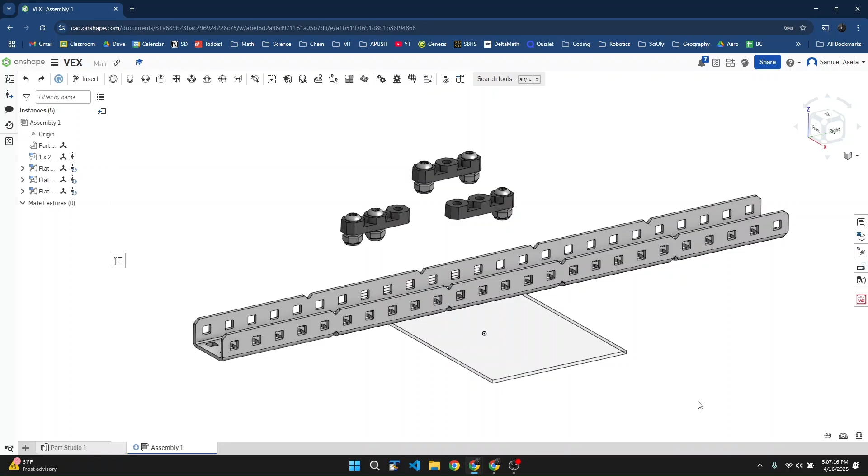To get started, I'm going to delete all of these parts in this assembly, and I'm going to insert two C channels. I'll make them 10 holes, and I'll just insert two here.

A good thing to know is that you can drag around your parts, or if you want, you can click on this icon with three arrows and move your part one directionally or two directionally. You can also rotate your part here, and it does it in increments of 5.

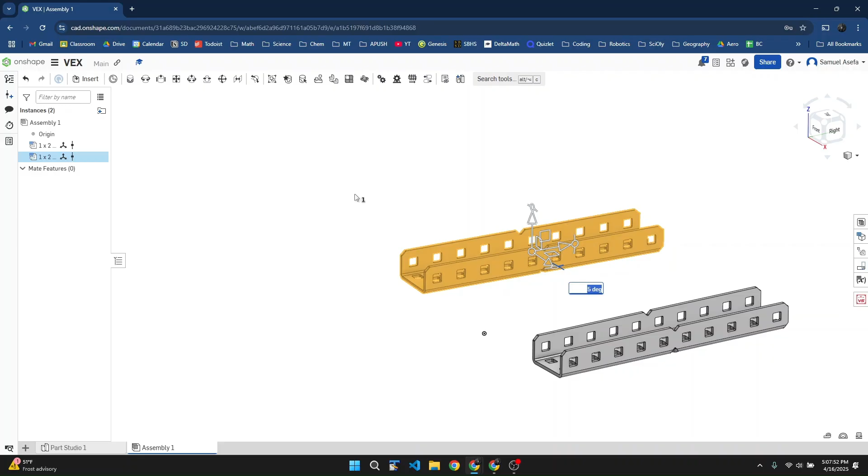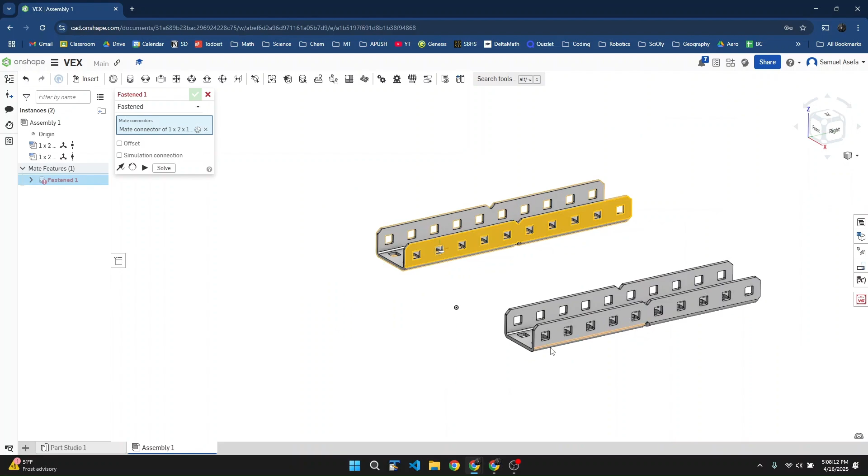Now if you wanted to mate some parts together, there are all these different options to mate, and the most common one is fasten mates. These are mates that restrict freedom of motion after you mate them in any direction. So if we were to mate this hole with this hole, and rotate this a little bit, it wouldn't allow us to move the C channels relative to one another. They're always going to stay this way.

To show how to mate parts together specifically, for fasten mate, once you click on fasten mate, you have to hold shift on the face that you want to mate with the other part. You hold shift so that it knows this is the face with all the mate connectors, and it keeps the mate connectors.

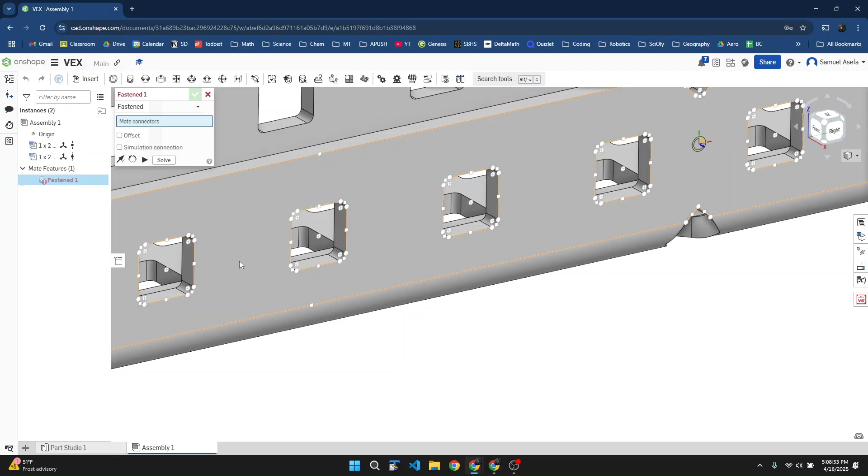Otherwise, the hole and the mate connector in the middle of the hole will disappear once you have your mouse over the hole. So you hold shift, then select the mate connector in the middle of the hole, and do the same thing for the other hole on the other C channel.

Then you hold shift and click this, and this allows you to have the two parts mated together. Right now you can see that they're overlapping one another.

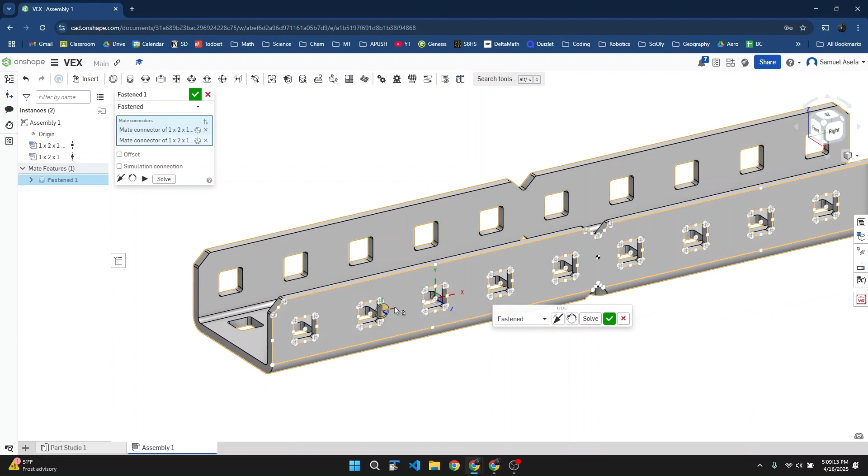Sometimes this happens, it's not the way you wanted it, or it's not oriented the proper way. Then you can just flip the primary axis or reorient the secondary axis, and this allows you to reorient the mate and do it as you desire.

I'm just going to click check because this is how I want it for now. And that's the most common type of mate, the fasten mate.

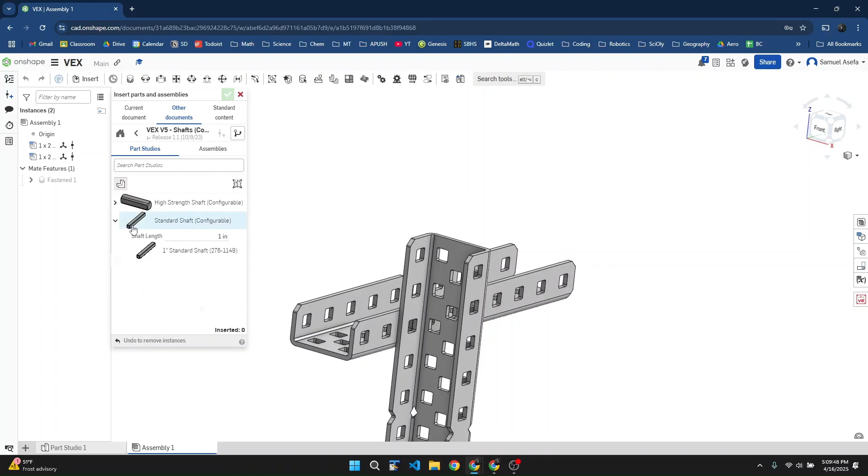Now to show the revolute mate, I'm going to be inserting an axle, because I feel like it's the best way to show it. I'll make it 3 inches long, and the way to mate stuff remains the same, but the type of mate you have affects how it can move afterward.

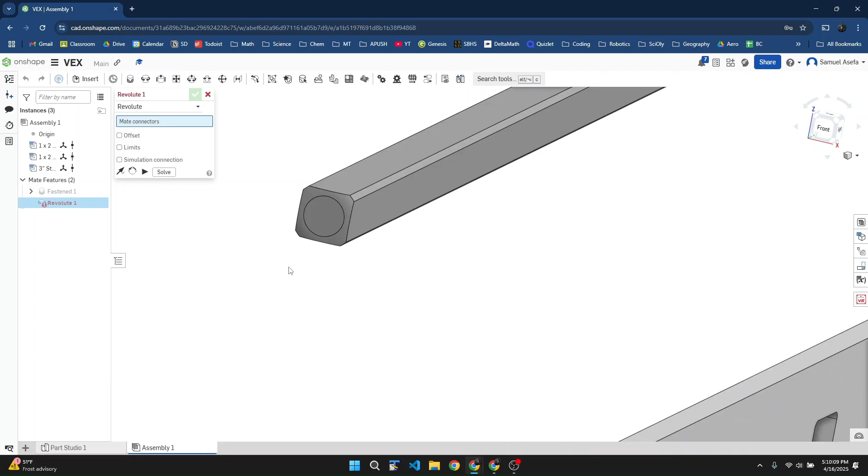With fasten mate, it doesn't allow you to move at all. But for revolute mate, if I click the center here and shift click the center here, it looks like it's the same thing.

But to show that it's a little bit different, you could right click on Revolute and click animate, and it shows you that it's able to rotate. Revolute Mate differs because it allows rotation in one axis, unlike a fully static mate like Fasten Mate. So that's how Revolute Mate differs.

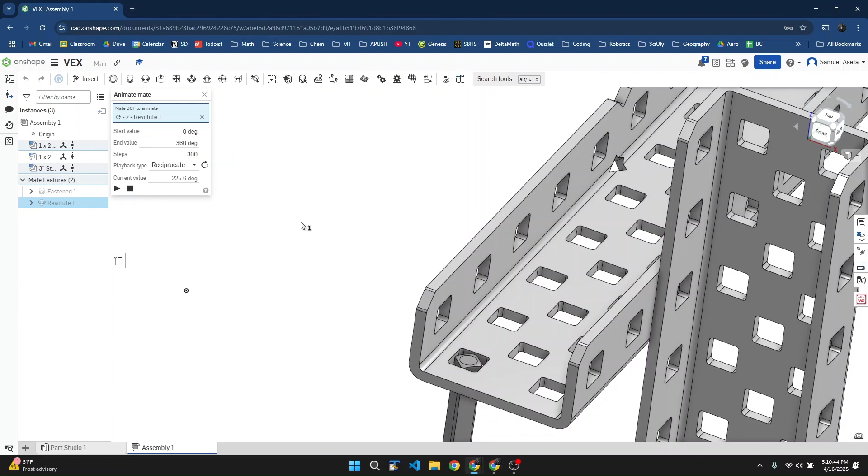You could use it for any parts that rotate relative to one another, and you can also edit mates once you have them.

So you could make this a slider mate, for example, and it shows you that you can slide this axle compared to where it was made originally, and you can see how everything else is moving. If you wanted only this axle to move and nothing else, you could click on the C channel, right click, and then click fix, and that would allow it to stay in the same place.

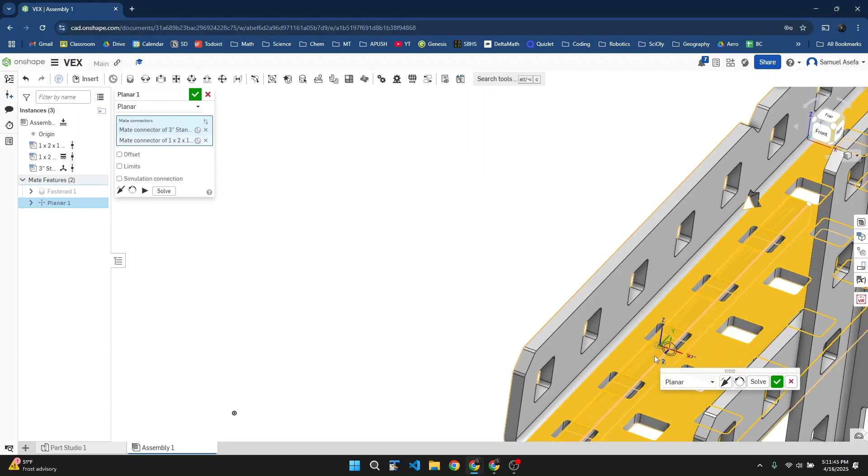Another type of mate you can have is planar mates. To show this, I'm going to delete this mate, and now I can move this axle again. Then I can just click on one of the faces of this axle, and then click on the face of this C channel here. Right now it's within the C channel, so I'm just going to flip the primary axis.

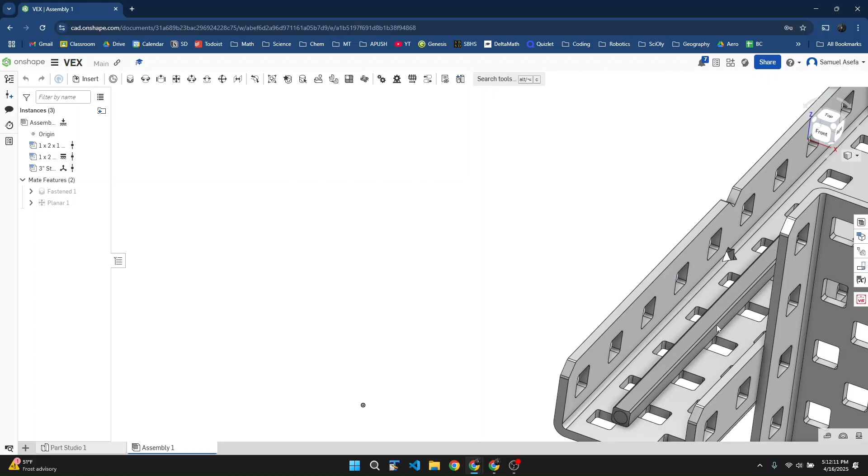After this, you can tell that you're able to slide this axle across the C channel. This is just like a hypothetical mate - you probably wouldn't use this in actual CAD, but it shows you that you can move it around. So let's say you had a robot on your field, then you could just drag your robot around the field and keep it on the field. So that's a planar mate. These other mates, you definitely won't use except for maybe parallel mate.

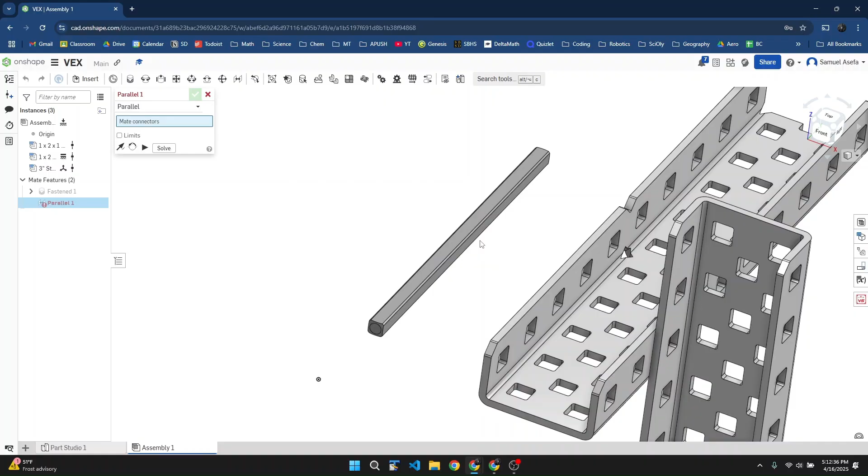To show what parallel mate is, I'm going to delete this. Parallel mate just keeps it - so if one of these parts were to rotate and it was parallel mated with this axle, then this axle would move so it's oriented the same way. To show this, I'll have this face, this top face, and then this top face also.

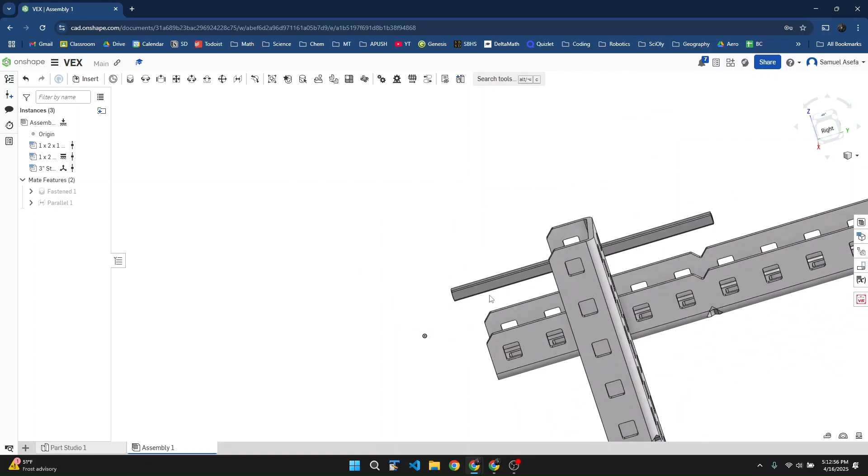Right now it connects them, but if you wanted, you could just drag it away. To show how it works, if you were to rotate this, I'd have to unfix this. If you were to rotate this part like this, then it keeps the axle parallel to the C channel. So sometimes it'll come in handy.

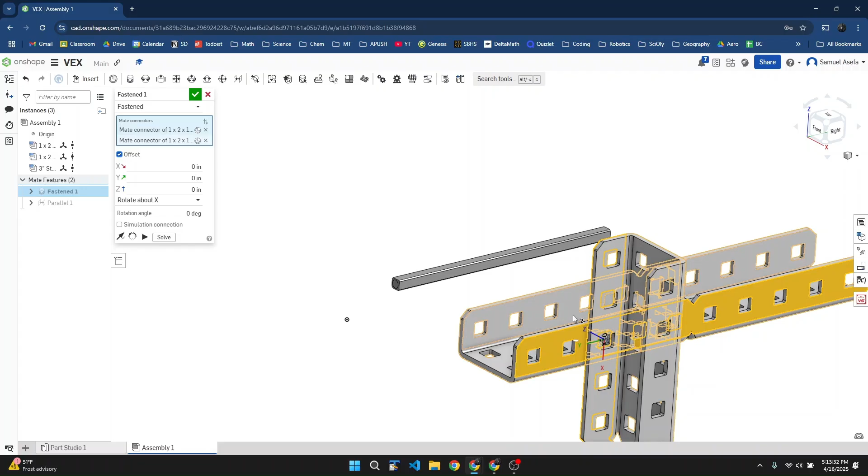So yeah, that's the last type of mate. And for offsetting, which I covered a little bit less - the way to offset, this typically is for fasten mates. You would edit your fasten mate, or when you initially create it, there will be this offset feature here. So you just click offset, and it allows you to offset the mate or the different parts that are connected by a certain amount in all three directions.

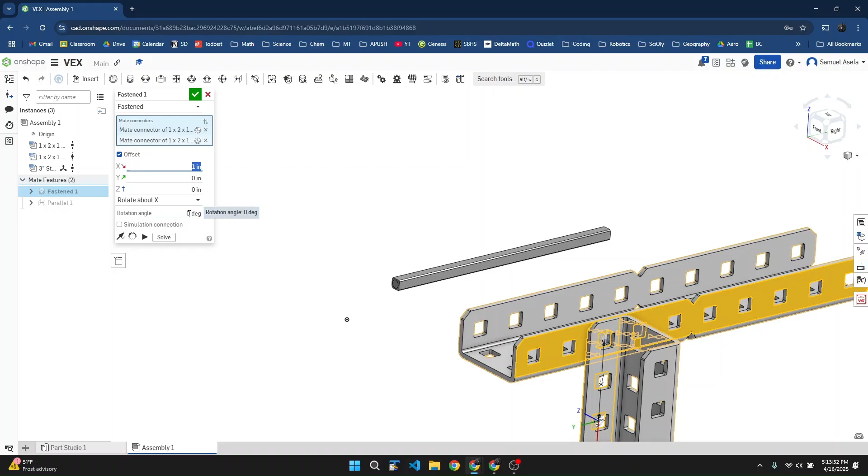So let's say I wanted it to be down a little bit more, I would just do like 1 inch, let's say, and then it moves it down based off that. You can also rotate as well - you could rotate about any of the three axes, and it allows you to rotate based off that. So let's say I wanted to rotate at 45 degrees, then you can rotate like that.

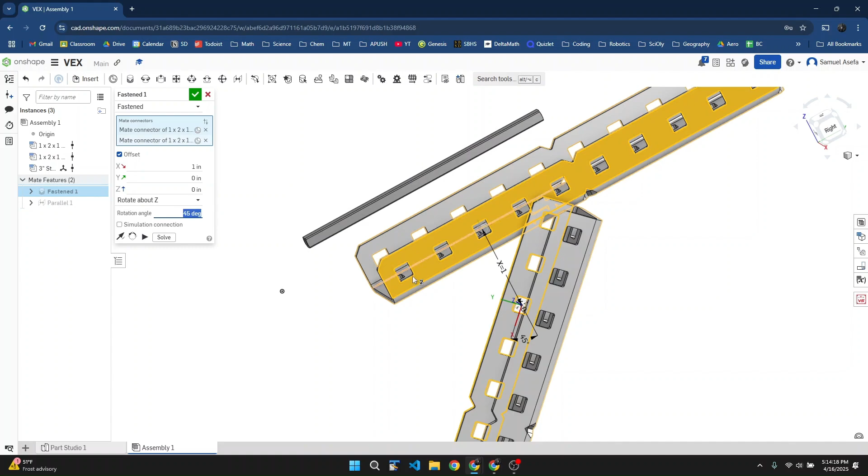Or if I wanted to rotate about the Z axis, so it's still connected, then I can do 45 degrees like that - a little bit off, but that's because of the offset. Typically you don't want to use offset like this because it'll mess up when you rotate later on. But if it was this hole connected here, then it would be rotated properly. So that's how you offset, and those are the different types of mates.